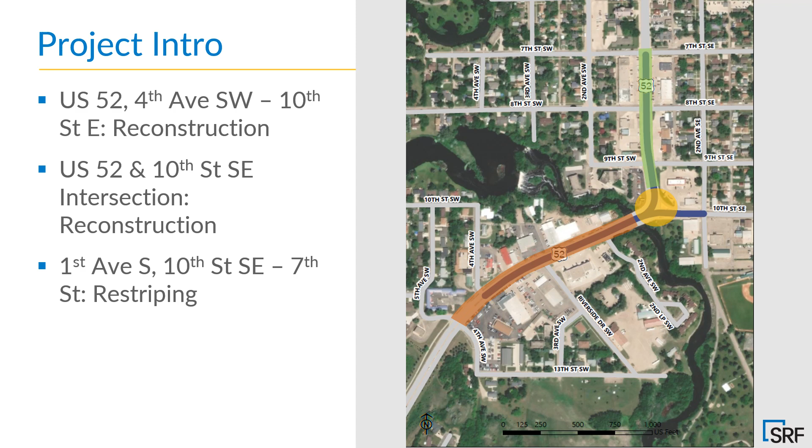A goal of the project is to gather input from property owners, businesses, residents, and others in the vicinity of the project. Outreach for this event included postcard mailers to each property abutting the project corridor, social media information shared for distribution locally and with the Department of Transportation, as well as walking the corridor to hand out postcards to businesses along the corridor.

On the day of the public input meeting, from 9:30 in the morning to 4 in the afternoon, project consultants and the Department of Transportation staff were available at the Alfred Dickey Library to meet with business and property owners along the project corridor. This was followed by a public meeting held from 5:30 to 7:30 in the evening at the same location, which included this presentation, boards with project information, and activities to solicit input from participants. A future opportunity for public input will have similar outreach and meeting format.

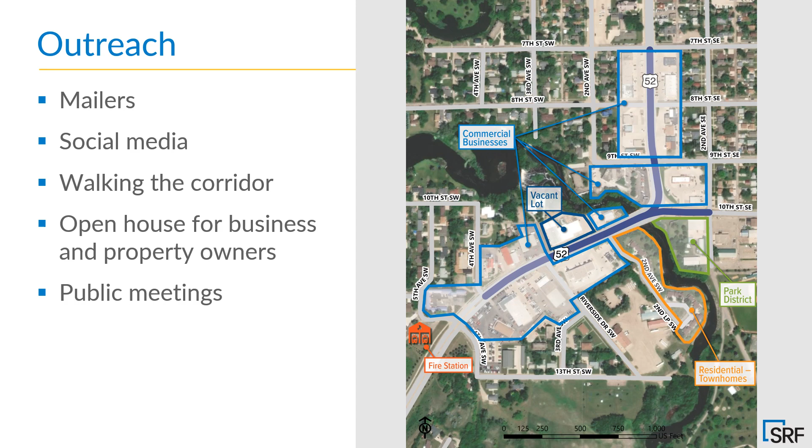Project development work will occur over several years and include 4 phases. Phase 1 included a brief review of project elements to be covered. We are currently in Phase 2, which involves development of project alternatives, environmental analysis, and public input opportunities. Phase 3 will take a selected project alternative into final design, coordination of utility conflicts, and the right-of-way process. Phase 4 is construction, which is anticipated to begin in 2027.

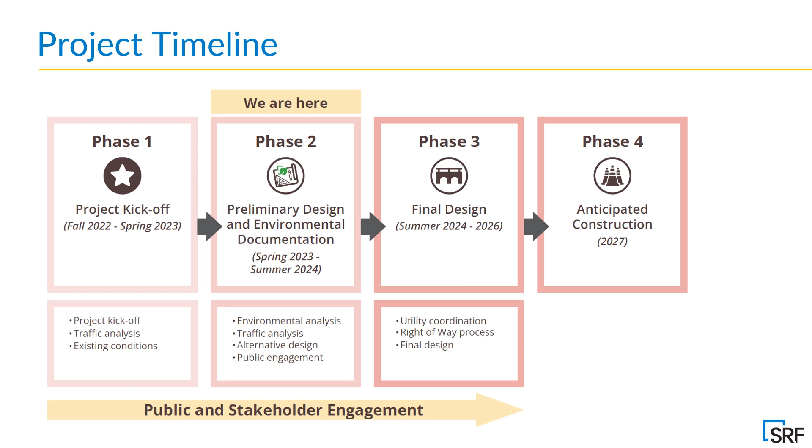So how did we get to this point? For some background, the project corridor is the most traveled in Jamestown. The need for improvements to at least the intersection of 10th Street Southeast and US 52 was first identified in the city's 2015 Land Use and Transportation Plan. The city later audited the 2015 plan and at that time identified the intersection as the highest priority safety project.

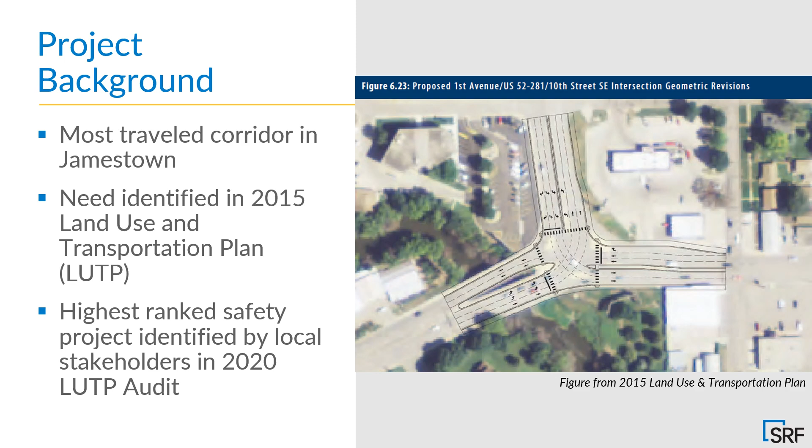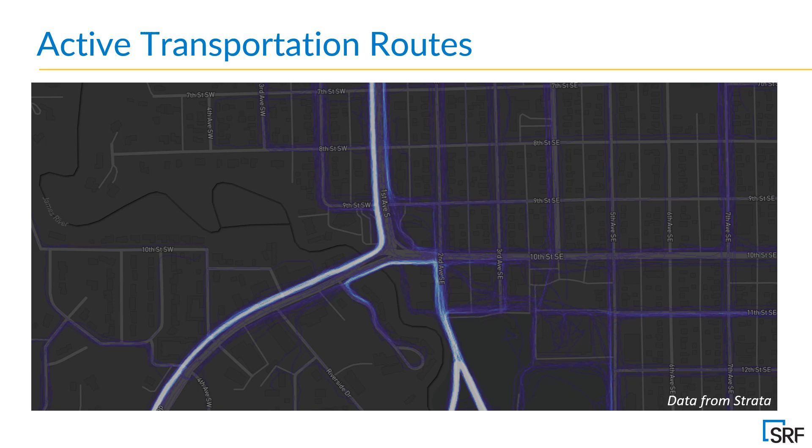The project corridor is also important for active modes of transportation, such as walking and biking. This graphic shows data compiled from fitness apps, including paths of people engaging in various forms of active transportation in the project area over the past few years. The lighter or more white lines identify the more frequently traveled routes. US 52 stands out quite noticeably.

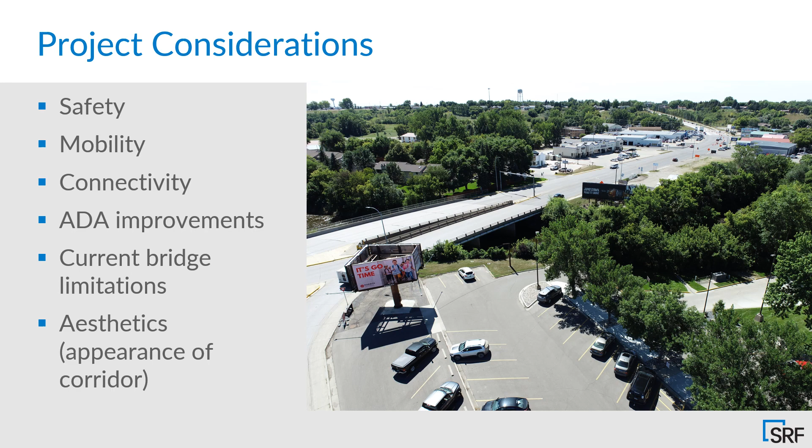There will be many issues to consider for this project. A handful of those issues are listed here. On the following slides, we will touch on some of these.

The reason for this project is the current bridge crossing, which includes 2 separate bridges on the southwest leg of the intersection of US 52 and 10th Street Southeast. The westbound bridge was constructed first in 1933. Later, the eastbound bridge was added in 1960 to provide additional roadway capacity. There are issues associated with the age of the bridges that have prompted the Department of Transportation to request replacement of the structures. In addition, the walkways on the bridges do not meet current standards. They are narrow and close to traffic.

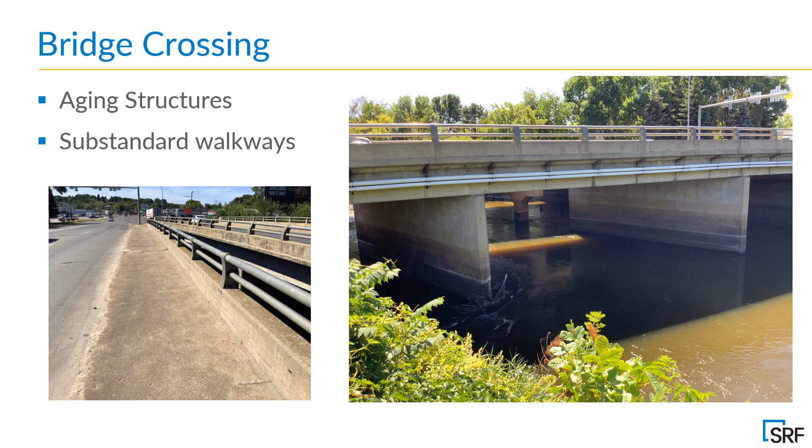There are also various environmental issues that need to be considered. These include, but are not limited to, obtaining different permits associated with crossing the James River, ensuring compliance with Section 106 of the National Historic Preservation Act, working through any potential impacts, direct or indirect, to adjacent properties, and adequately addressing public park impacts as required in the U.S. Department of Transportation Act of 1966. The consultant team will be preparing an environmental document to discuss the environmental issues and potential mitigation as required by the National Environmental Policy Act, or NEPA.

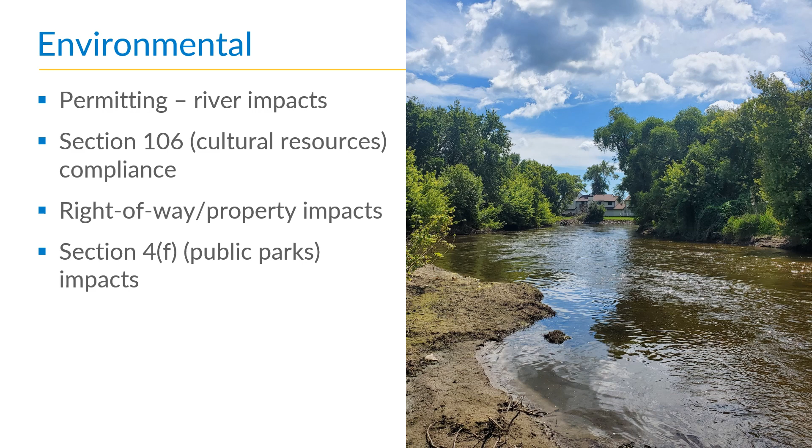And of course, there are transportation issues that will need to be addressed. I will touch on some of these issues in this presentation. There is a noticeable lack of pedestrian crossings throughout the project corridor, especially at the US 52 and 10th Street Southeast intersection, and also where local streets intersect with US 52. Sidewalks and/or paths also do not extend along all of US 52 between 4th Avenue Southwest and the intersection of 10th Street Southeast.

For vehicles, the transition from 4 to 3 lanes on 1st Avenue South north of the intersection of 10th Street Southeast can create challenges for traffic attempting to merge. On US 52, the high frequency and close proximity of local street access and private driveways adds potential conflict points for turning vehicles.

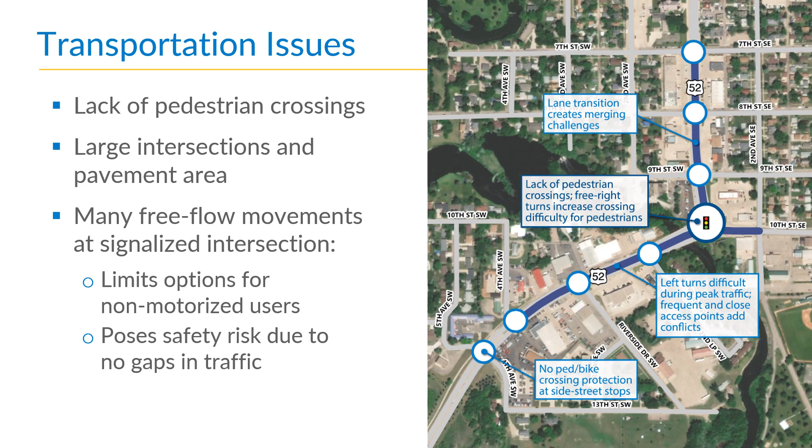The consultant team has initiated analysis of traffic conditions in the project area. The analysis begins with understanding the sources of traffic that contribute to the project area, both in the present day and likely sources of traffic in the future. The graphic on the right shows traffic or trip origins in the city and surrounding area. The graphic on the bottom left shows 2022 approximate traffic volumes by line thickness in the city and surrounding area.

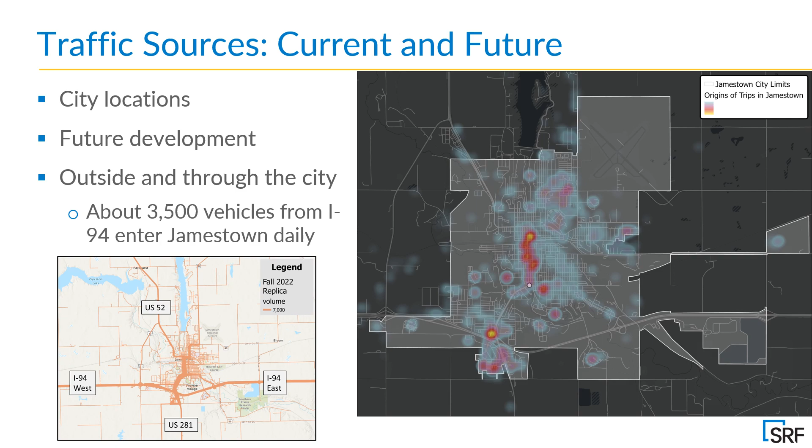Recent traffic counts help to show approximate volumes of traffic in and around the intersection of US 52 and 10th Street Southeast as of 2022. US 52 is the busiest segment of the corridor. The dominant movement of traffic in the corridor is from US 52 to 1st Avenue South and vice versa, closely followed by US 52 to 10th Street Southeast and vice versa. The movement from 10th Street Southeast to 1st Avenue South and vice versa is the least used movement.

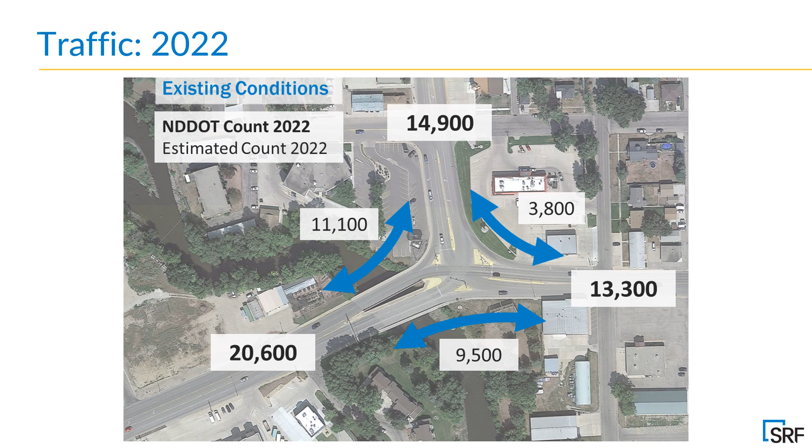The consultant team modeled traffic in the year 2045 and assumed 1.1% annual growth to get there. This graphic shows what traffic volumes are forecasted to be in 2045, which is the top number. The 2035 forecasted volume is shown in the parentheses, and the 2022 rounded volumes are shown in brackets. The distribution of traffic through the corridor and the intersection of US 52 and 10th Street Southeast is expected to be similar to 2022, but with additional traffic.

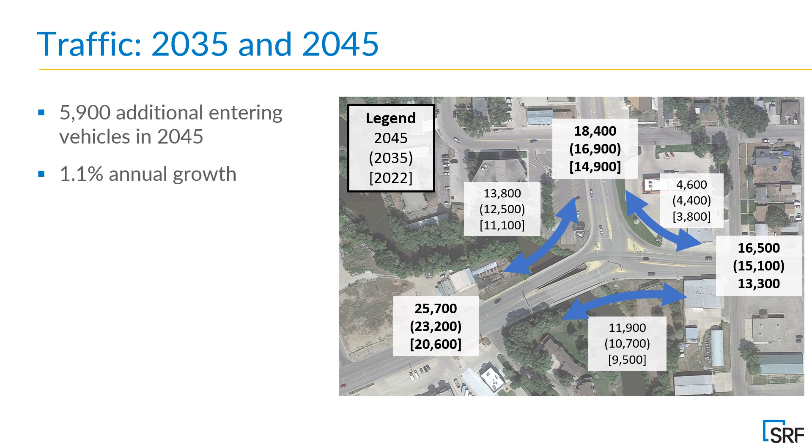The next 3 slides show current, or 2023, modeled traffic operations and modeled future 2045 traffic operations. Traffic operations are evaluated by level of service, or LOS. Letters are assigned to classify how easily traffic is moving through an intersection. Level of service A and B is free flow, or close to free flow traffic. Level of service C is stable flow, or near free flow. Level of service D is approaching unstable traffic flow. Level of service E and F are unstable flow or a breakdown in operations. The Department of Transportation considers level of service D and above as acceptable traffic operations.

The morning peak period of traffic, the midday peak period of traffic, and the evening peak period of traffic were all modeled to understand level of service at intersections in the project area. Level of service is indicated in the graphics with colored circle symbols. Green is level of service A or B, yellow level of service C, orange level of service D, and red level of service E or F. The split circles are for intersections with stop signs at the intersecting local street. The left half circle is overall intersection level of service, and the right half circle is level of service for cars waiting on the side street.

Morning peak hour traffic is shown to operate smoothly along 52 and 10th Street Southeast, with some side streets showing increasing delay currently and in the future. Midday peak hour traffic is similar to morning peak hour, with increased delay at more side streets, both presently and into the future.

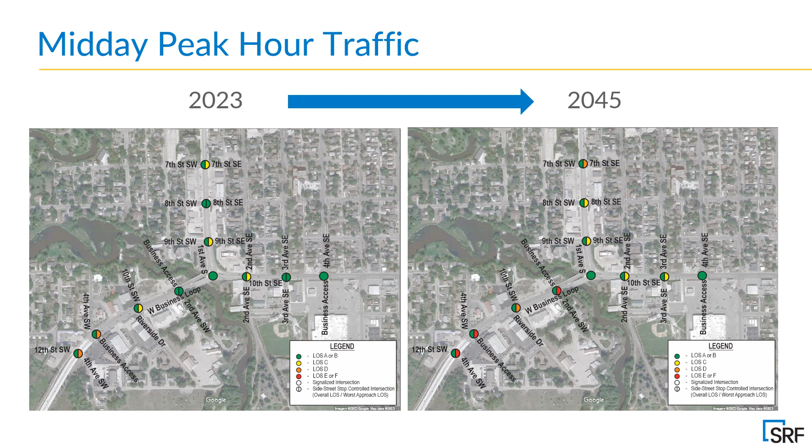Evening peak hour traffic is also similar to morning and midday, but with yet more delay at side streets in the project area. These side street delays mean it is difficult during these peak periods of traffic for cars waiting at stop signs to find gaps in traffic in order to turn left. It is important to note that level of service A or B is maintained through US 52 and 10th Street Southeast in all peak hours, both in the present and in the future.

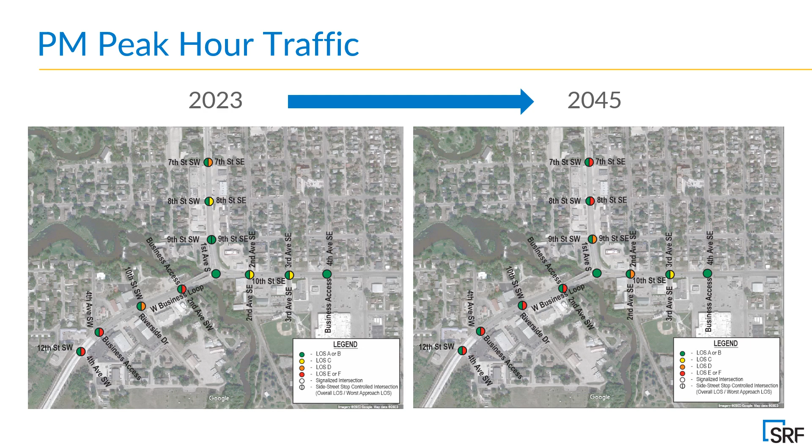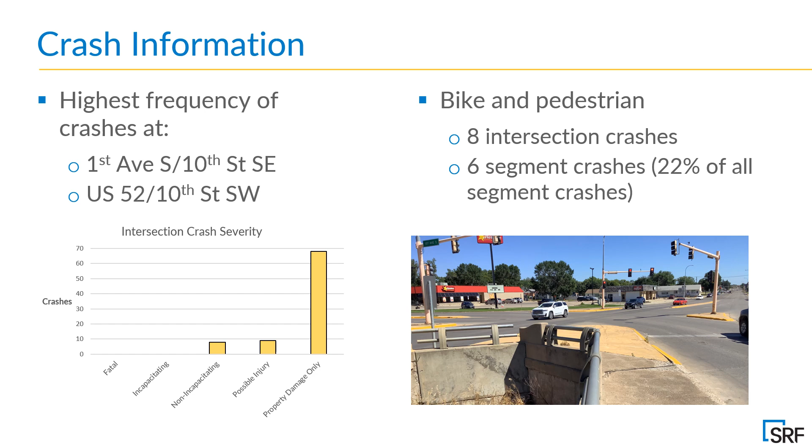Analysis of the past 5 years of documented crashes in the project area is also being performed. At this time, the analysis shows that most crashes occur at the intersection of 1st Avenue South and 10th Street Southeast, and the intersection of US 52 and 10th Street Southwest. The good news is that most crashes are low in severity, most involving property damage only. However, pedestrian and bicyclist crashes have been documented at a noticeable frequency.

On the past several slides, I highlighted many of the issues that the consultant team has identified in the project corridor. From what we are seeing with transportation needs in the corridor from all modes of travel, crash information, and the aging bridges, we will be evaluating a range of potential improvements to the corridor. Public input in coordination with the City of Jamestown and the Department of Transportation will be used to further inform and refine our information. As you may be able to tell, there will be a need to balance various needs, such as needs associated with vehicular traffic, active transportation, and bridge replacement.

Moving the project forward, we will next evaluate input received from this public input event, use input in our analysis of the corridor to develop a statement of project need and purpose, or the goal of the project. Layouts or designs of project improvements will be developed and then shared at the next public input event in the first half of next year.

So thank you for following this project. If you are willing to provide input, that would be greatly appreciated. Your comments with respect to the following questions would be helpful. First, what issues have you seen or experienced in the project corridor that you would like to share? Also, do you have your own thoughts about needed improvements to the corridor?